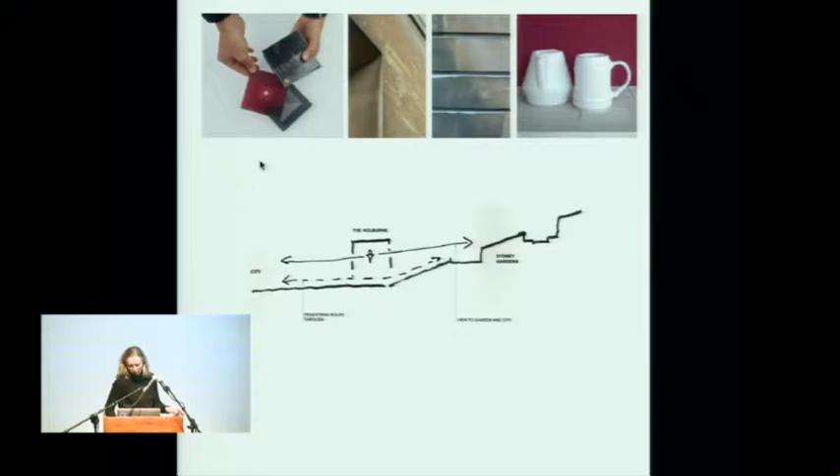We're dealing with a very delicate Georgian facade, beautifully crafted in Bath stone, and it was about how we could transform and engage to bring back this magic of memory of what had been, through the materials we use.

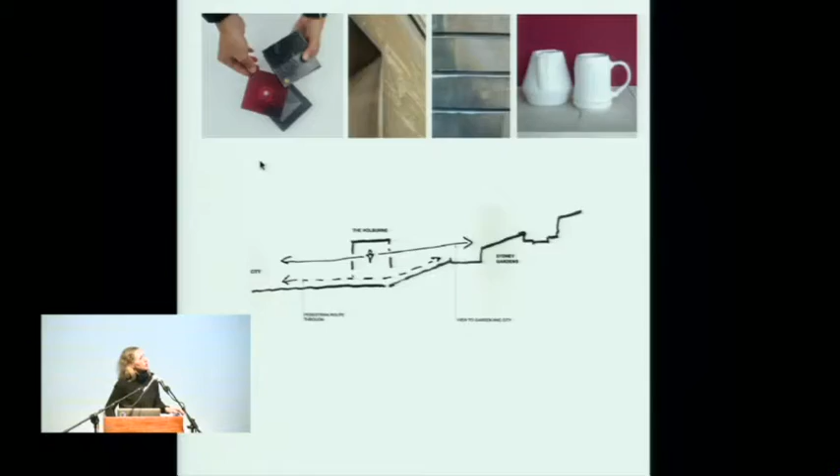For a very long time I worked on this. We decided it could be porcelain, the material. It had to have something that was crafted, that had a beauty to it, that was reflective, that actually reflected the gardens and the sky.

So it took me to research on faience and ceramic, working with a company called Shaws of Darwen up in Lancashire, who had been doing faience on buildings for over 200 years, and who were now only making sinks, Belfast sinks. But what we really enjoyed was the depth of the glaze, and that feeling of something that has been crafted was incredibly important to the project.

And it becomes a story with planners, it becomes a story with clients on how you can get them to engage in the idea as well.

From having these fins that were made as prototypes, just to show how deep the glaze is, it refracts the Bath stone behind.

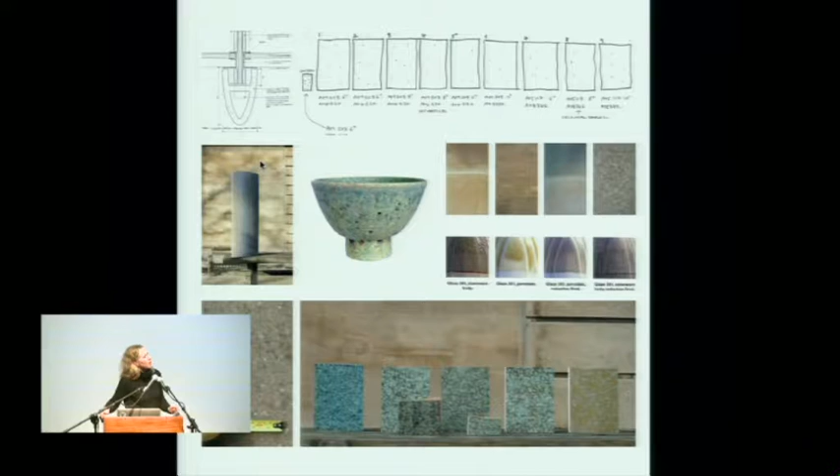These were actually a blue-green colour. And the Bath planners insisted that they should be a Bath stone colour, so the story went forward for about another year of identifying the qualities of Bath stone and looking at that palette itself.

And in the end, we had this sort of compromise of creating a ceramic that did both.

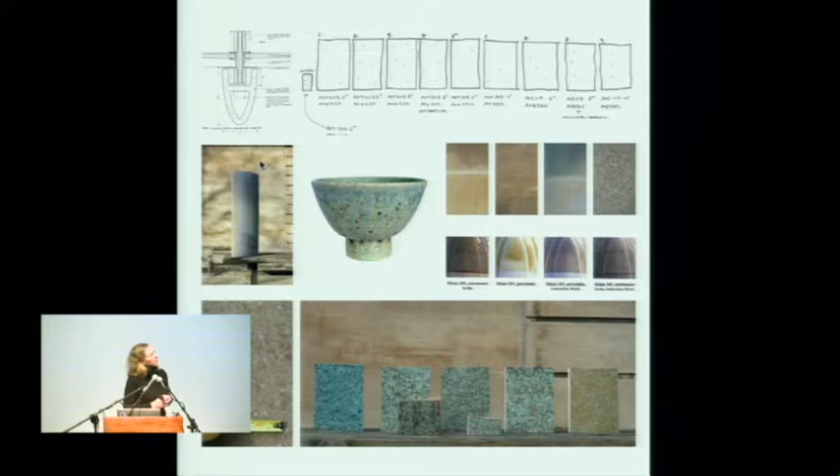Today it's a successful addition, and it shows, without even talking about the actual architecture of the extension itself, this kind of background that I came from and that interested me, and that I've taken forward with our own practice.

Probably slightly something else about the diving board. There's something about coming out of a very large practice and making the leap into something where you know you want to just engage with your own work.

So the scale of projects very much changed. I was quite fortunate - my first client I met on a Ryanair flight, and he said he'd bought a house in Spain. Did I know anything about building? I took that on as a project, and we helped, working with a local Spanish architect, look at the site.

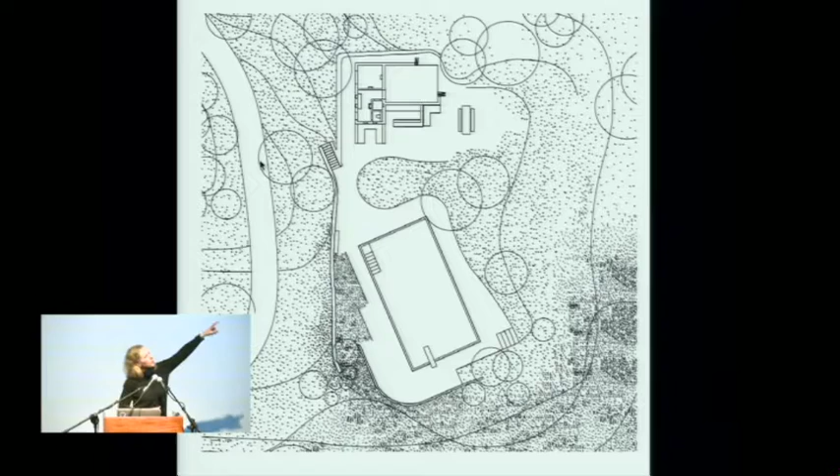Again, that really meant working - I was keen on using the natural stone we were finding around the site where the construction work was going on for the house. Working with the local stonemasons, we were able to engage with these walls and work with the levels in setting up the new pool house, which was embedded into the land, and the swimming pool, working with the existing landscape that was there.

This is a site with this incredible rich soil, and it was about embedding something into the land, away from the house, which sits in the background where you can see the crane, working within the olive trees, using the natural stone to embed something into the land.

We worked with engineers in London to create this concrete wall, in situ concrete, which could act as a terrace, giving you another plateau and level to enjoy the views around.

And underneath there was a bar and changing rooms, a gym and a small studio, and then that took you on to this level deck swimming pool.

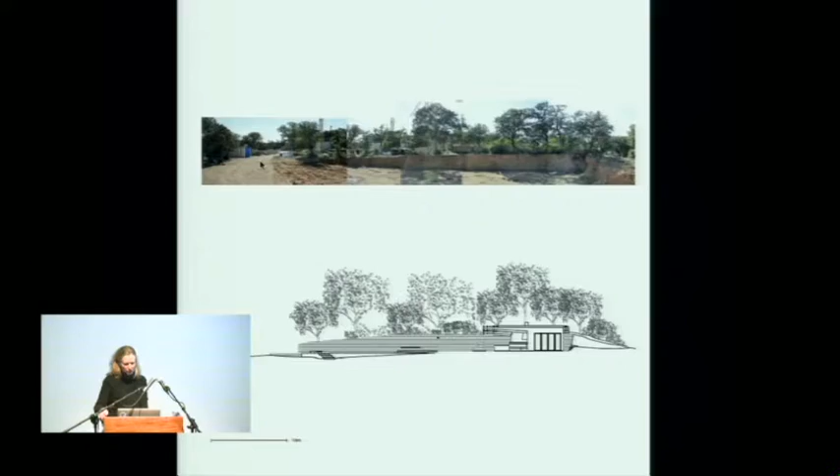We use models not just as a way of describing the project to clients, but very much in-house as a way of thinking about how we're going to build. The model is the starting point, the first thinking of how we're going to craft the idea or notion for the project.

This was done by an ex-student of the AA who now works for me, made during his year out. He carved this out of a piece of walnut. It really, to me, was about talking through this process of what the project was trying to engage with.

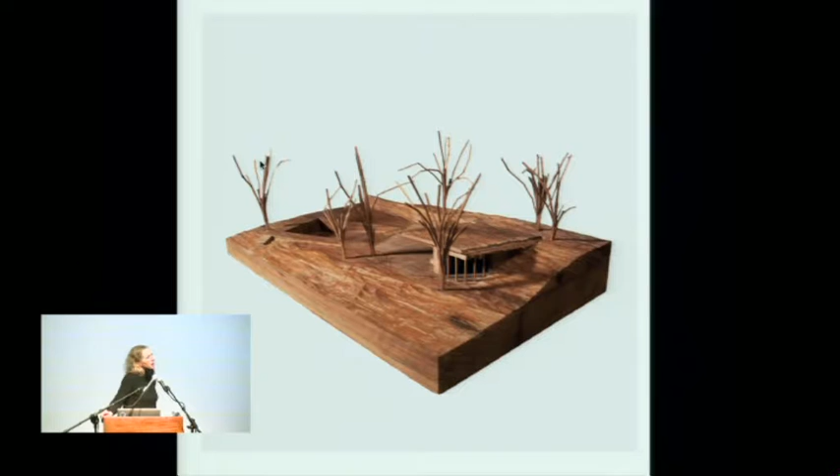It was very much from the land, and this idea of pulling up the terrace, almost like raising the land, which was propped on the corner, and then cutting the pool into the same surface.

These are just some images of it inside. So this is the concrete roof, which, obviously with the weight and thermal property of the concrete, keeps the interior very, very cool. It has a central spine wall and these four fins in which sort of timber louvers are woven in.

Unfortunately, the quality of the build in Spain at the time was not very good, so it took me being there and working with contractors to get the details and have it made. But it was an enjoyable process.

Again, forming the walls. Often the drawings were unable to translate to the local guys who were on site, but it actually meant more of a project of being there and deciding where staircases went, marking them out, and working with the land.

For the pool, it was about the idea of engaging with the horizon, so there was nothing coming up from the land. We used local Spanish limestone, and it's still settling. These projects take about 2 years before they start to bed themselves down. They've had a very dry summer, but the idea is still there.

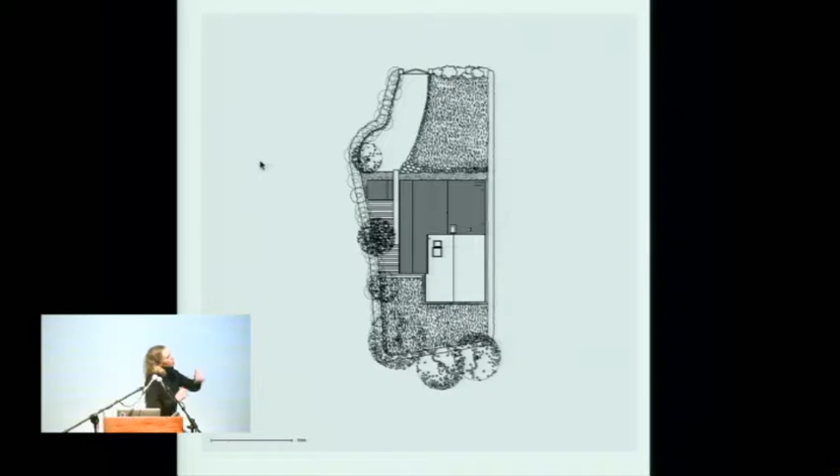But as you can see, this house sat within a very large garden plot. It was all down to the fact they had about £50,000 to spend, and what could we do for £50,000? So the economy and efficiency within the thinking of this idea was really the driver for the project.

Not just in what we could rebuild, but thinking what we could retain. So the birch ply back box of the house was the existing sleeping block, with 3 bedrooms and a bathroom within it. By retaining that and wrapping a new extension to the front, we were able to remodel the house and give them a large living kitchen dining space on the front, a hallway where people could hang out.

We're kind of amazed with the quality of housing that's being offered, where everything has to be worked to a very minimal dimension with minimal ceiling heights. So this idea was actually to play with volume. It's not expensive - it's the economy and efficiency of the materials you use and how you design and plan these spaces.

One of the clients - they were both teaching at university - wanted the ability to work at home, so there was a small office which could also double up as a 4th bedroom. So it was this thinking through of how they would actually use the space.

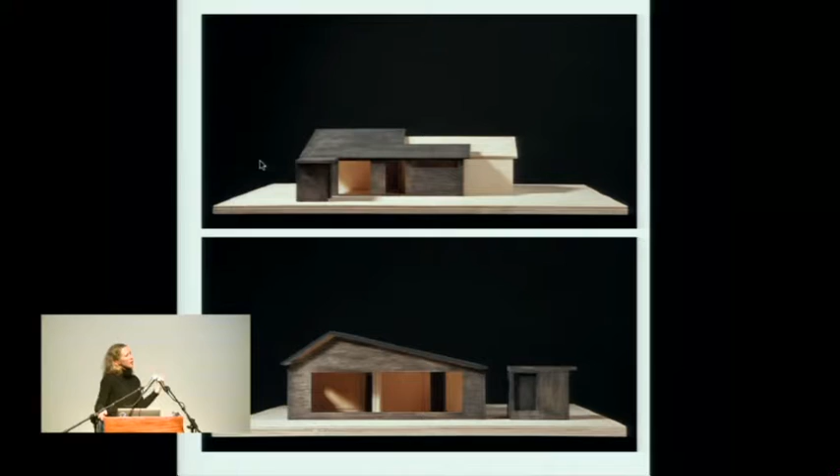Where we had openings, the side slot openings at the top allowed an engagement with the garden, which was actually quite well planted, and also to do with neighbours that were bothersome on the other side. So as we turned and worked around the elevations, it was making decisions about where light would and would not enter the building.

Again, talking about making the model for this project, slightly like a doll's house. My 3-year-old daughter Jean, at the time, loved this house. When I turned up, she could understand her house, she could understand where her bedroom was.

While doing the laser cutting for this, the plans and the elevations were always simplified. I kind of enjoyed this project because there was such an efficiency to every detail, to every elevation, that it was the piecing together, or the reassembly, of this house. We were taking what was there, getting rid of the parts we didn't want, and then piecing it back together again.

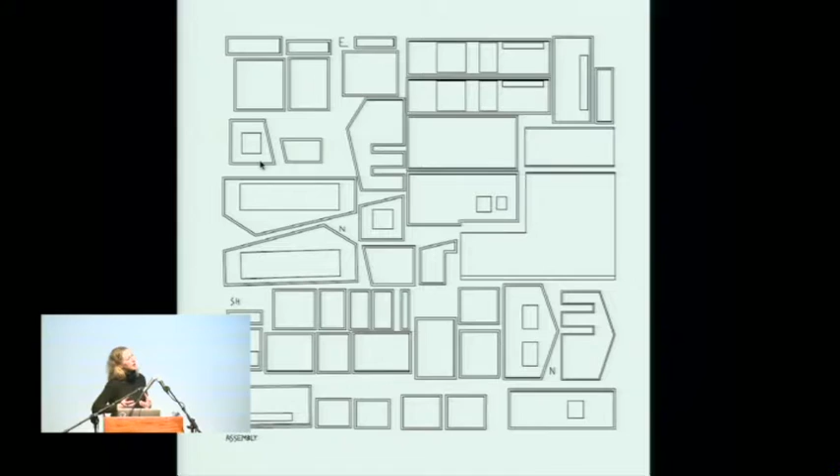We used a black engineering brick as the main facade. One of the clients is a fashion designer. She wanted a Tom Ford house. She said, why not? And so this became the Black Sheep House, as it was known by them, because the suburban neighbours thought, what on earth are they doing? Why are they doing this to their very nice bungalow? So Black Sheep House it became.

Working with a great local builder, we worked with local trades, so the local brickman was absolutely brilliant. We had a slate roof put on, and there was nothing heroic about the geometry or form. It was very honest. The materials were honest, and the design had to be incredibly honest. We used softwood, painted timber windows because we couldn't afford hardwood windows.

This sort of thinking through all the materials, the cost of every material, was a very different approach to where I'd been in Granada, with a hedge funder and his wife who had taps flown in from Spain, from America, because we can. This became a very tailored project, but everything was done with intent and honesty.

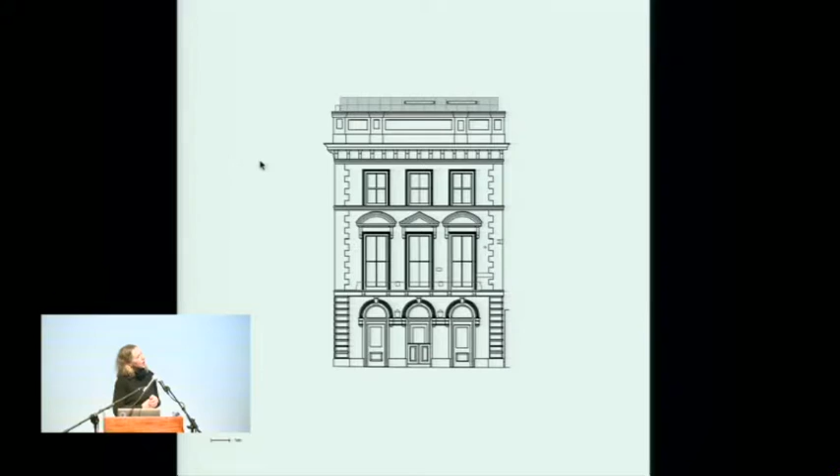So we've taken these volumes and taken the buildings, and again we're generally battling with planning on how we can add an extension to, say, a roof. There's a bit of sort of dentistry, really, in how we knit into these existing buildings and give interesting flats, apartments to speculative buyers.

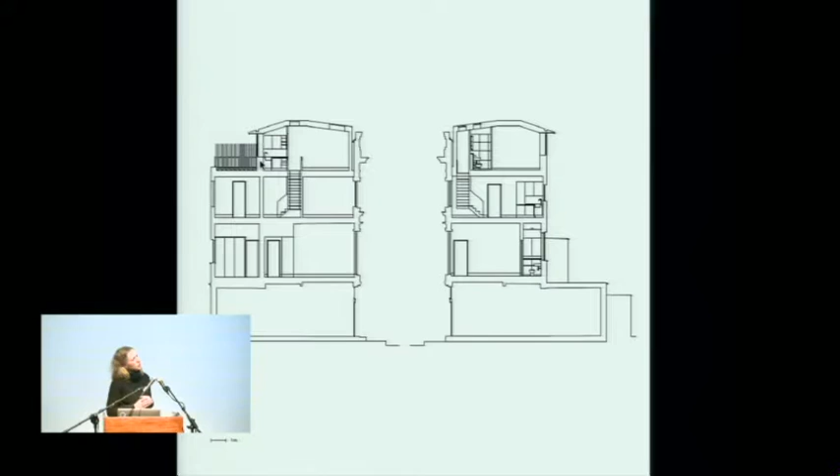This one in Fulham, we were blessed with a very high parapet on the front elevation. So the idea was we could tuck in this kind of metal box behind the parapet and create new duplex apartments with a terrace to the rear, engaging with what can be interesting living.

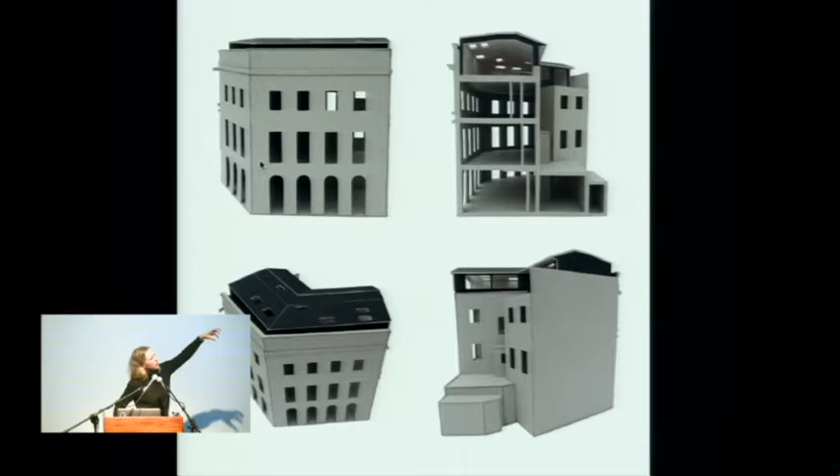The next series of photographs are done by photographer John McLean, who I've worked with on and off over the years. Rather than give him a brief to capture the work, he just went in and did these triptych views of how he's seen the interiors.

Again, it's reinstating what the good is that's there - keeping existing windows, upgrading the building fabric, putting in good quality oak floors, and creating spaces and connections to other rooms that become interesting ways of living.

We're probably doing - we have a portfolio of about 3 or 4 of these projects - looking at how we carve staircases in, or make staircases in, and how we can actually create quite pleasant living spaces from top-lit lights.

And rethinking how we can detail handrails. We're always dealing with quite constrained spaces, so again it's thinking about how we can make cuts in walls. It's not about adding things in - everything is thought through as part of the initial concept.

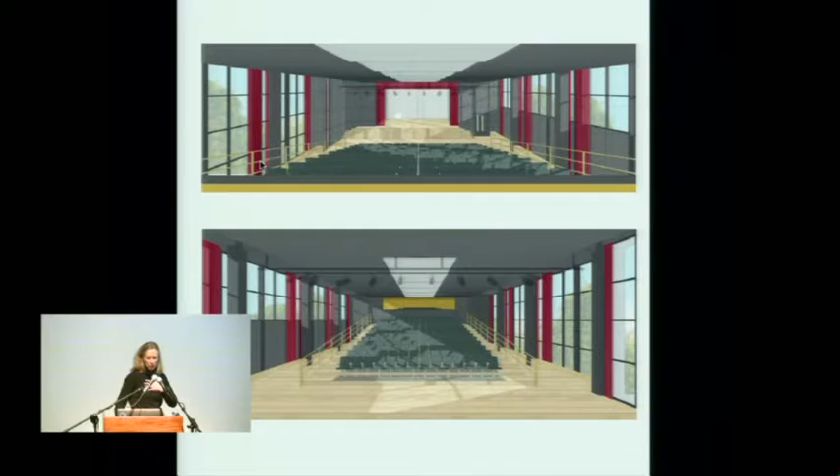These are just simple images, actually all done for a client. Again it's this idea of representation for something that they would understand. We've had to work with these existing red velvet curtains, but putting in a new seating structure.

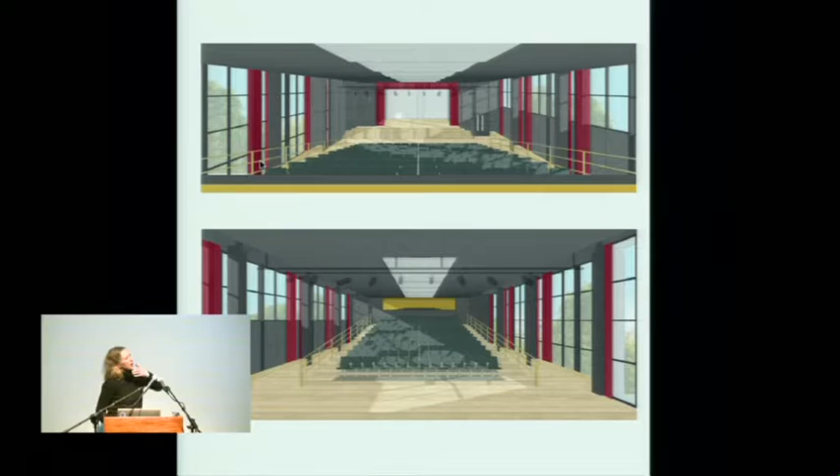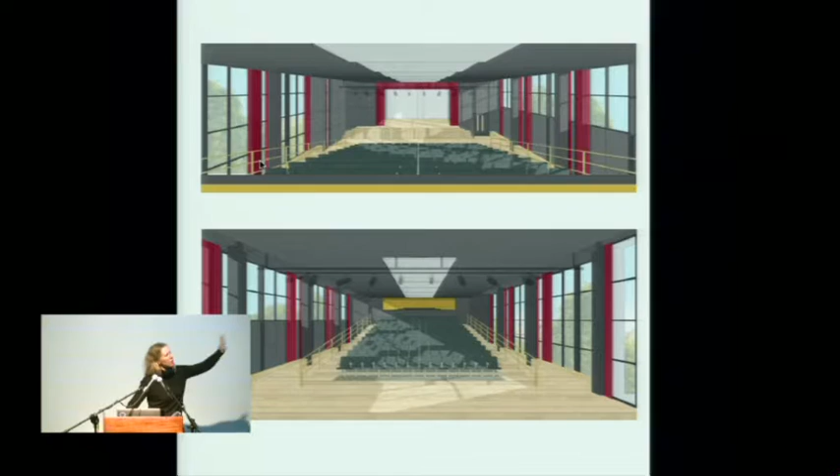We've punched through the back wall to create another seating area behind, to increase the flexibility of the space. This is under construction - we're recladding all the walls.

Working with a great joiner to actually be able to make and think through some of the details, we've put together quite a nice pack of information, thinking through how the panelling is made and how that works with the simple construction. Every corner and thought has been considered.

In between doing these live projects, we have done quite a few international projects, competitions. I've kind of veered away from UK competitions because we never get anywhere, and it's very difficult when you start up - you don't have a body of work, you don't have a reputation.

So internationally we were successful in getting onto shortlists, and the church scheme that we did in Våler in Norway two years ago - we came second out of around 700 entries.

It was an interesting journey. I went out there, like I do with all competitions, to see the site. It's a kind of one-horse town, about an hour and a half north of Oslo, in a very wooded area. There's a very big pulp mill next to it, and this notion of the church being a beacon in this quite flat landscape, for a very large community, in a town that has 2 petrol stations and a hot dog stand.

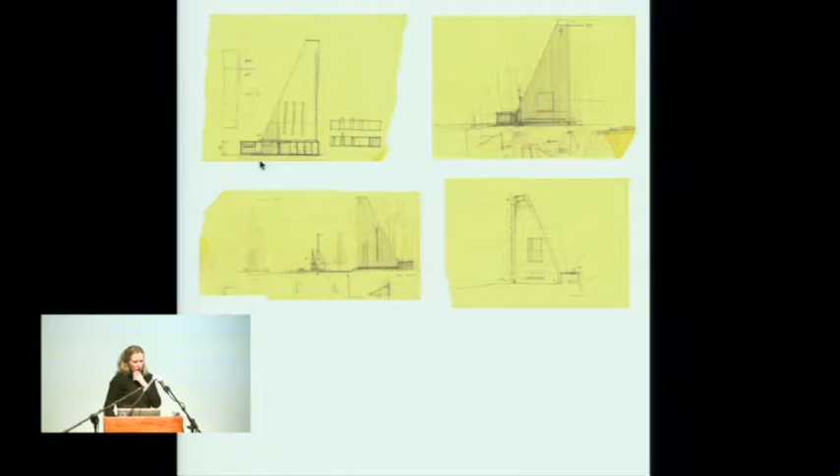Early thinking through of the elevations, and really the model became a way of thinking through this idea. We worked with Simon Smith, of Smith and Wallwork, who works a lot in timber as an engineer, and I knew myself from having been to Norway and also done a previous competition in Finland, the harshness and how you build in that climate.

So the idea of the shuttered tongue and groove external box gave the contractors a time period where the external walls could be built, the shuttered box could be built, and then the interior could be constructed during the winter months. So there was a kind of continuous flow to this program.

The kind of research and thinking, obviously, with stave churches and this mythical and narrative element within Norwegian history, meant that this interior could be—the brief required—all timber.

So we came up with this idea of stacking these timber blocks. They're about, I think, just over half a metre long by about 200 wide, manageable pieces that could then be stacked to form the main worship space.

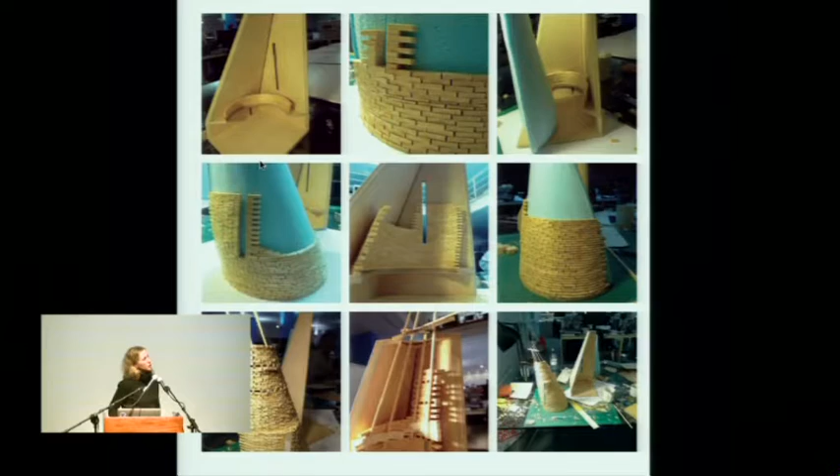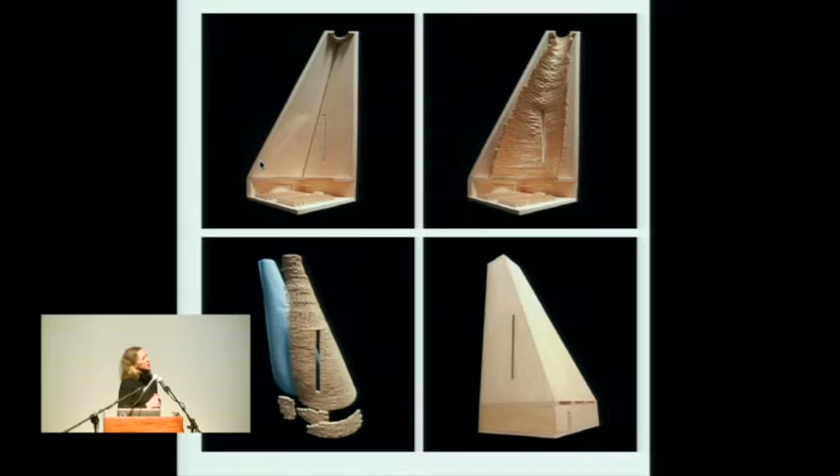So this set of images really tells the story, that this shroud to the external world and this crafted interior to the inside, and the idea that these blocks could be carved into, and they offered further connection with the community itself.

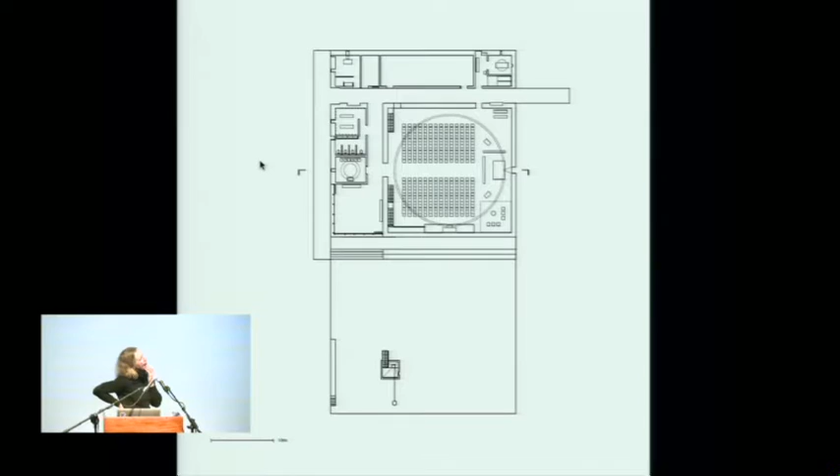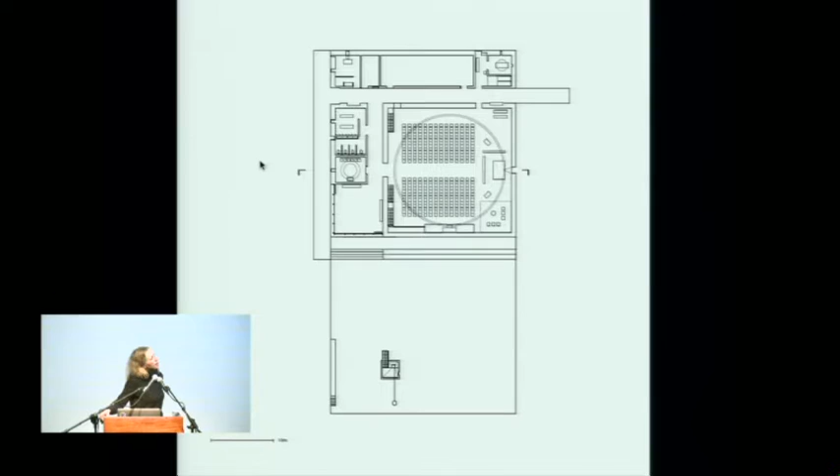A really simple plan to do with a civic space, a civic face to the square where the bell tower was, main entrance on the corner, public entrance on the corner. So weddings, baptisms, celebrations could enter on to the main public space. There was an entrance at the top for the minister or the priest, and then there'd be a more private entrance for funerals to the east elevation at the side, and so that was the ordering of this plan.

The only thing I felt was important was a way of refracting sunlight. So a notion of suspending this bronze ring within the main worship space would also maybe play with the acoustic as well.

Moving on quickly, Store Street - some of you may have seen, a competition we did for the London Festival of Architecture last year, and we were successful. Again, it was temporary architecture, something I hadn't ever done before, so that was a whole new world of thinking. One of the main drivers for this project was a conversation we had with the Building Centre and New London Architecture, who were battling with Camden Council, because this is a car park, the North Crescent to the South Crescent to Store Street.

You probably know it, it's just across the block over there. They wanted to get rid of the cars - there were sort of 4 or 5 car parking spaces - and they wanted to regain this crescent to use it for events, pop-up events, and also for the people working around there.

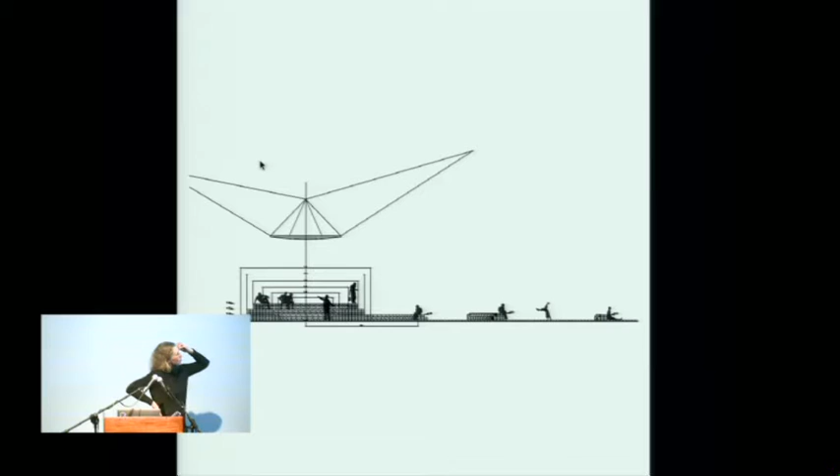The other idea was we wanted to have this kind of disc of water. At the time it was flooding everywhere at the beginning of the summer last year, so on the news all the time was more flooding. And so there was this tension between this idea of water and the amphitheatre and this surface that would be of the sandbag.

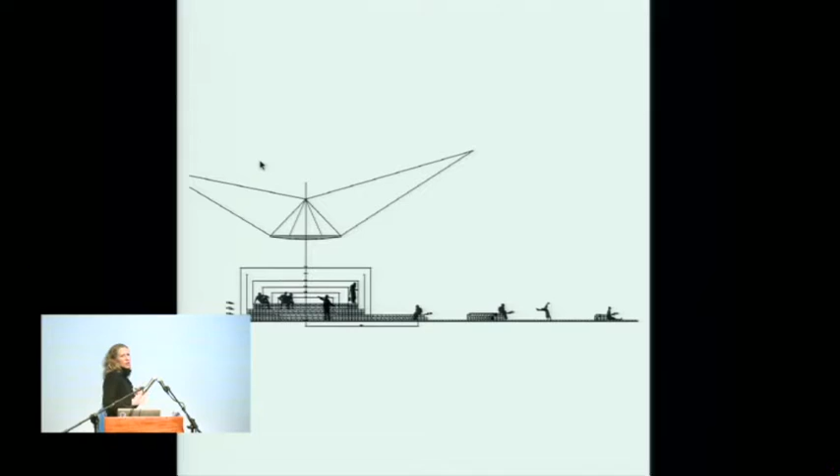Again, this model has travelled far and been used a lot and picked away at. Really, it was to convey this notion, and it was used for planning purposes, and we were successful in gaining back this square for the residents of Store Street.

And then a lot of research, going back to when you look at the research done for something like the Holborn Museum, even though you've only got 3-4 weeks to design and build and raise the money and physically make this crescent, which I didn't realise I was doing. It was important - it's about detail, about understanding the material and the object that you're wanting to use. Grade 1 military sandbags are beautifully, beautifully made.

We did a lot of research. We have a lot of sandbags in the studio, unfilled sandbags, and the stitching on these grade 1 military sandbags is beautiful, blanket stitching. It was a real craft industry. We worked with a guy called Paul Mitchell Sachs down in Cornwall. He'd been making these sandbags for 100 years, and there was nothing else like them, unlike the new plastic sandbags you see looking very sad holding down motorway signs. I found myself cycling around London seeing another sad sandbag, with nothing of the grandeur of the military grade 1 sandbag.

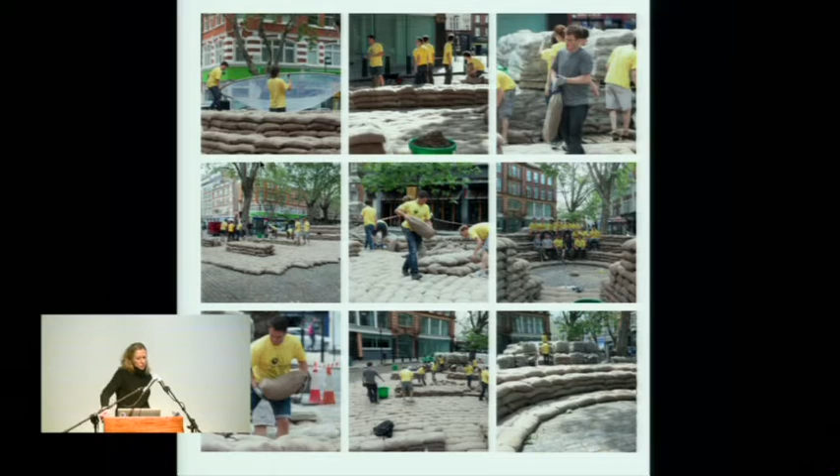Getting the sandbags there, 7 articulated lorries came during the night, and then with some graduates we had 3 days to build this project, and it was a fantastic experience.

It was incredible how on the Saturday and Sunday people stopped and asked and talked to us. We'd planned it, we'd drawn it, we'd detailed it, and it really seemed to capture people's imagination, exactly this idea of how we saw this object, with them saying, 'What are you building? Is it a bunker?' But then afterwards, apart from the fact it rained continually for the 3 weeks it was up, people really used it, and it didn't matter that it was wet.

It was from here that we were invited to Venice. And God, do they need sandbags in Venice? So they thought, this is good, and we were invited to come up with an idea. They really just wanted Store Street for Venice, and I was unable to do that—we don't think like that, I don't think like that. So I said, well, we'll look at a site and we'll look at what we can do. Obviously the sandbags and Venice in ruin, and Venice flooding, it worked, but it was understanding how we would apply this.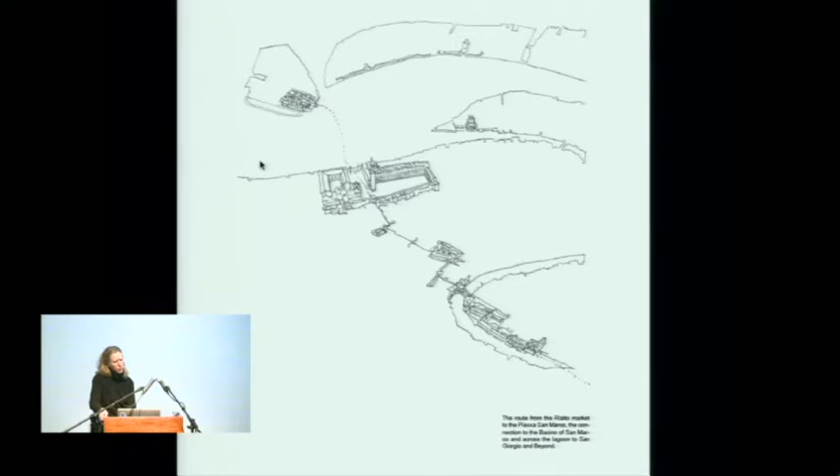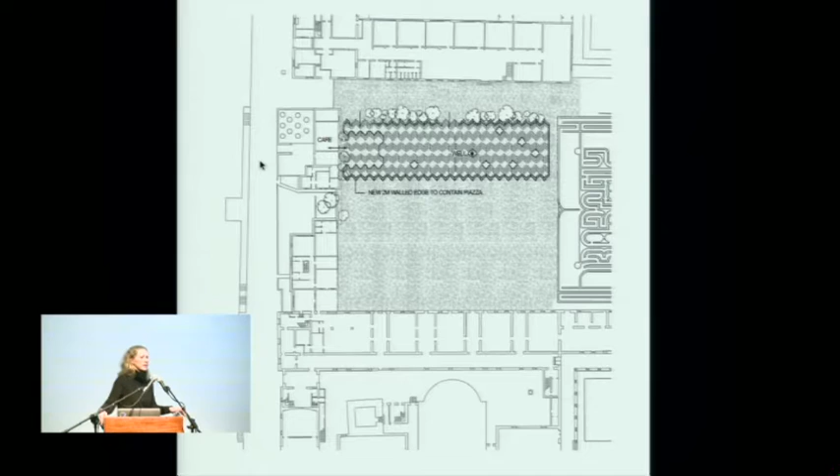So the thinking evolved. What didn't evolve with San Giorgio was, it's quite difficult when you are given a space and then the monks don't want you to have as much space as that, and the funding you have to raise, and the whole cost this year of trying to conceive this project, it just wasn't gelling. And also, this is not what squares in Venice are about.

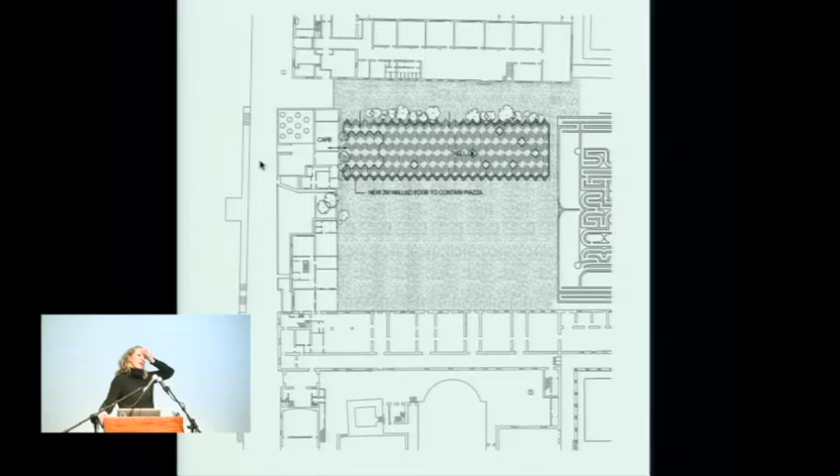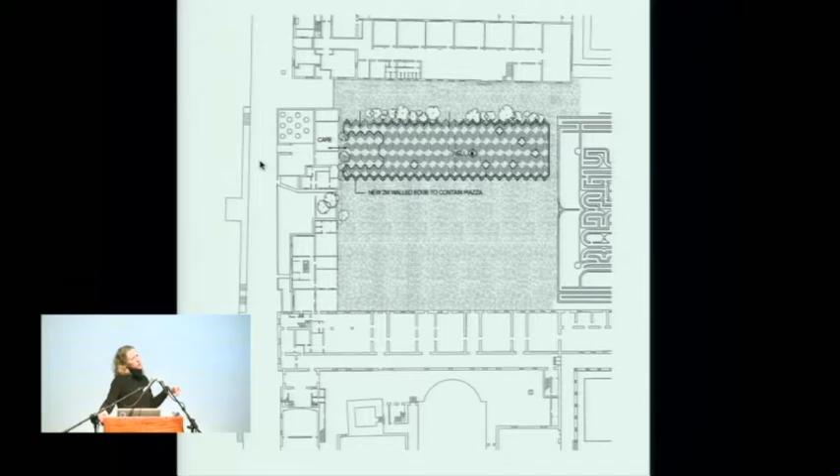Squares in Venice happen between buildings. They're passageways that come together. It's not, let's build a church and, oh hello, let's have a square. It's actually the spaces around, the spaces in between these buildings. And this just felt like, even though we were being asked to give them this square, this idea of the walled square just didn't work on plan.

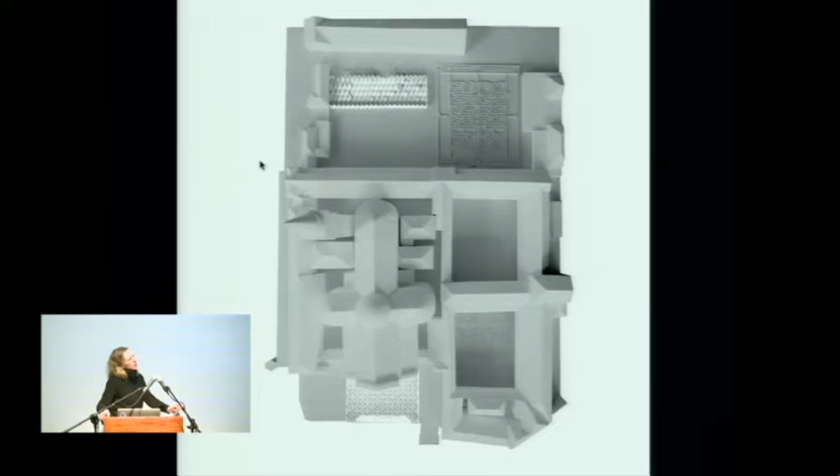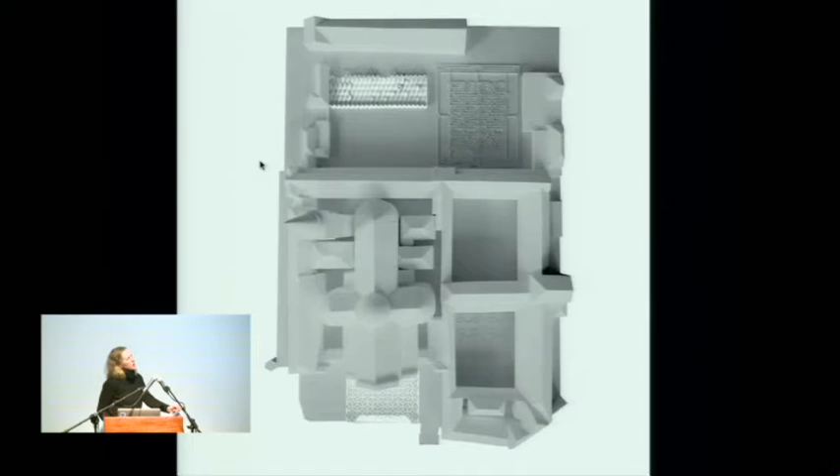And I'm happy to show this and happy to say that it doesn't work. It's an idea. The thinking was there, but it didn't engage with the notion of what we were trying to do. So I stopped, and we were asked about a month ago to reconsider doing a proposition for next year's Biennale.

And the surface, this idea of Masegni continuing along, is something that we felt had more of a narrative to what we were talking about. San Lorenzo is an interesting church, architecturally. It was the facade that was never built.

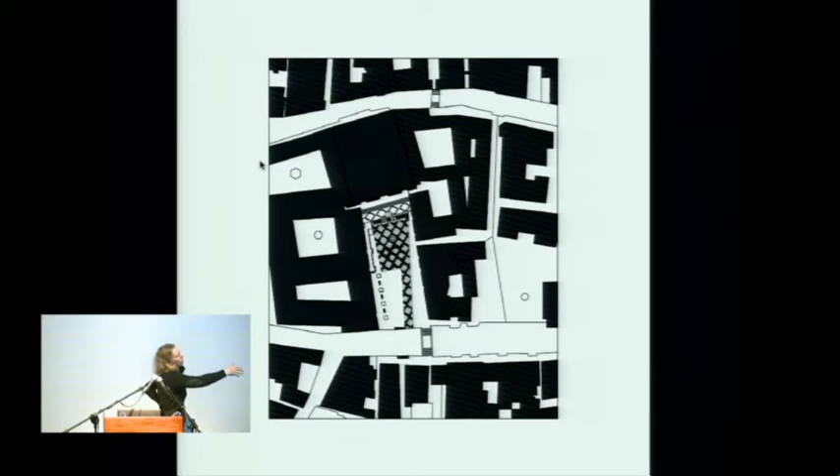Again, how we can take this idea of the square becoming part of the only connection across the lagoon, but actually building a wall that maybe never was - a wall that isn't about defence, isn't about keeping people out, but it's a wall that you enter, and it becomes another passage to the square.

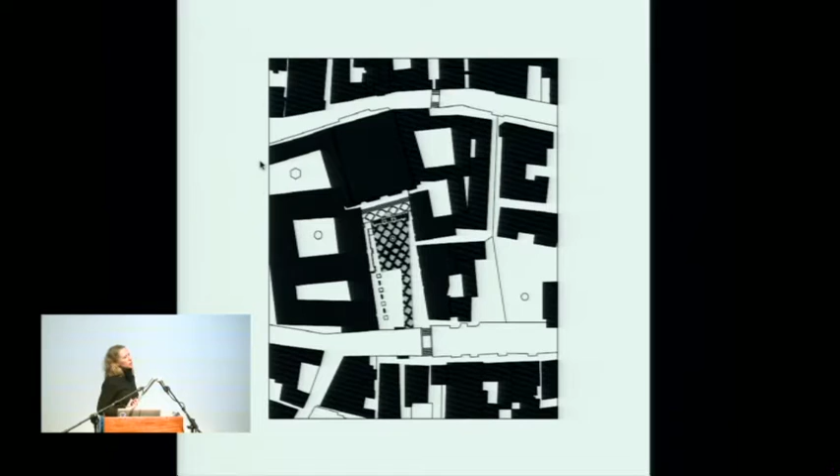And thinking again this idea of surface and marbling that we were thinking about before. And a wall that has two sides, one towards the square and the other towards the church itself, and this dislocation of wall to create this new space. And the thinking will go on this one.

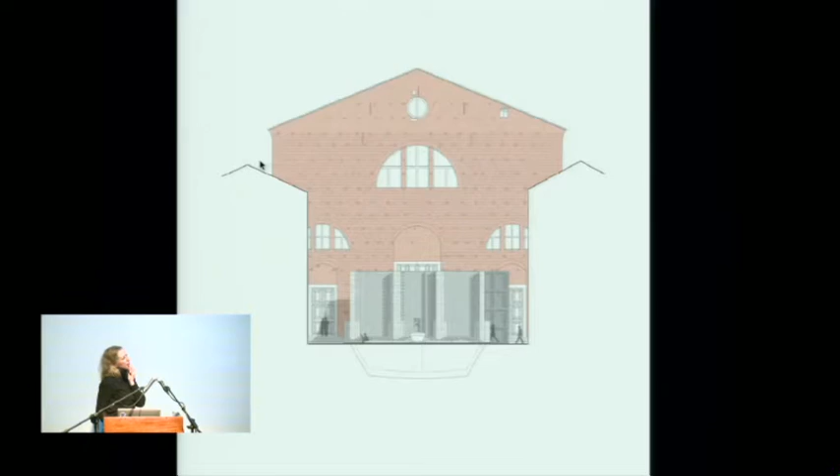And so forth, and possibly we will be able to offer another space. Finally, another part of the country we're working in is in Scotland, up on the Argyll coast, in Argyll and Bute, just south of Oban, a place called Loch Neish.

I was approached by an old client who's a trustee on the museum, about a year ago. He sent me a photograph and said, if I showed you this site, what would you build? It's a 12th century medieval kirk, with the remnants of the graveyard around it, and there's this strange ensemble of buildings.

There's a boathouse down on the edge of the loch, in the corner there, and there's what's known as Kirkton Steading - a farm cottage and a barn that sits next to this medieval kirk. The land has been in the family for about 150 years, and they have a lot of these little buildings that they want to use for the family, but also as holiday lets, holiday cottages.

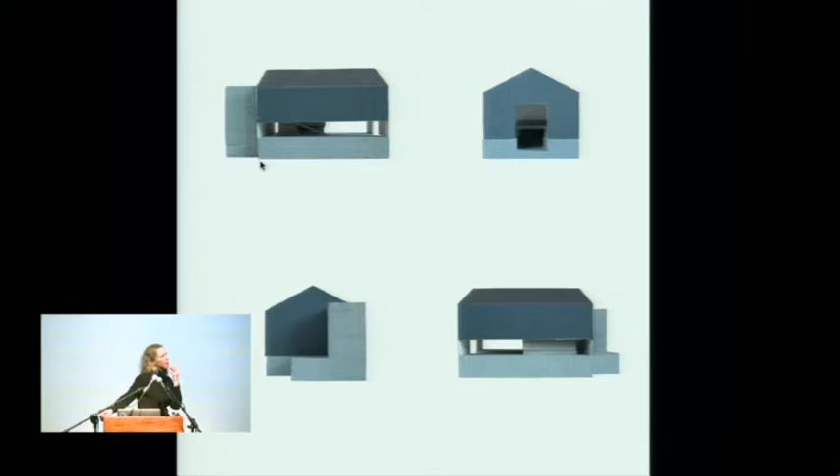So this is just simple thinking of how we stretch and jack up - we cut the base of the cladding, then prop and jack up this existing steel shell, and create a new platform for sleeping with a staircase above on the concrete, and build a toilet block to the back. By jacking up this facade, you get these windows on the long elevation, so you engage with the landscape - you'll be in the landscape, but always get the great view from the main elevation.

And these are, if we work through ideas of whether it's timber or if we don't keep with the steel wall, but just keeping that form. The battle will not be the boathouse.

The battle is with the tower, and with the setting, as you can see in plan here. It's very much working with this edge - the rock behind the existing steading is where the stone for the steading and barn were taken from. So the crofters would arrive and just work with the land to build a house, hence the orientation of this within the landscape, and also how it sits to the wall of the kirk. They weren't obviously being met by English heritage when addressing this project.

But it's very beautiful, this oak tree that sits to the side of the kirk, and the only other tree that sits on the rock behind. So it's actually working with the land and how it's orientated to the views, to engage with something that becomes a 6 metre by 6 metre plan, and it slightly turns its back to the kirk - slightly dancing away from this form of the two houses.

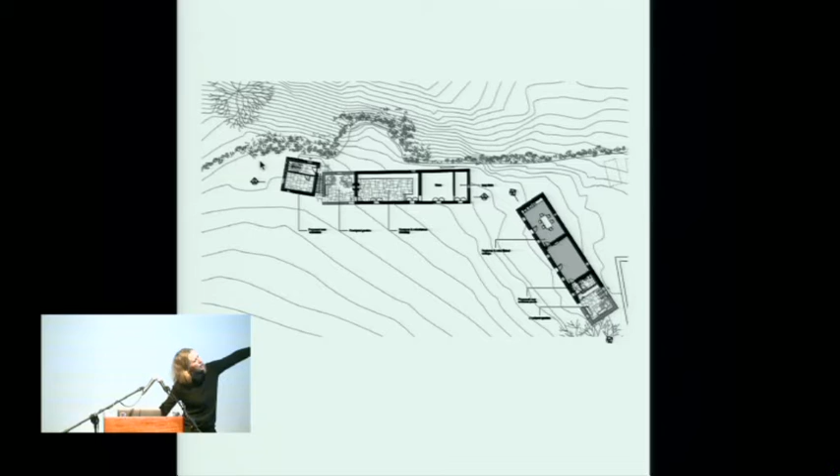You'll get a living space and a kitchen and dining. Now that house in itself, someone could live in on their own, or a couple could live in or stay. We'll probably build a mezzanine.

We're just basically doing a very light touch to the inside of that. We'll put in new windows. We will line the walls and the roof, but very little else.

The idea as a grouping of buildings, as one house, is you go outside into the land to enter the next building. It doesn't need to be covered - you will get wet, but you're always within the land.

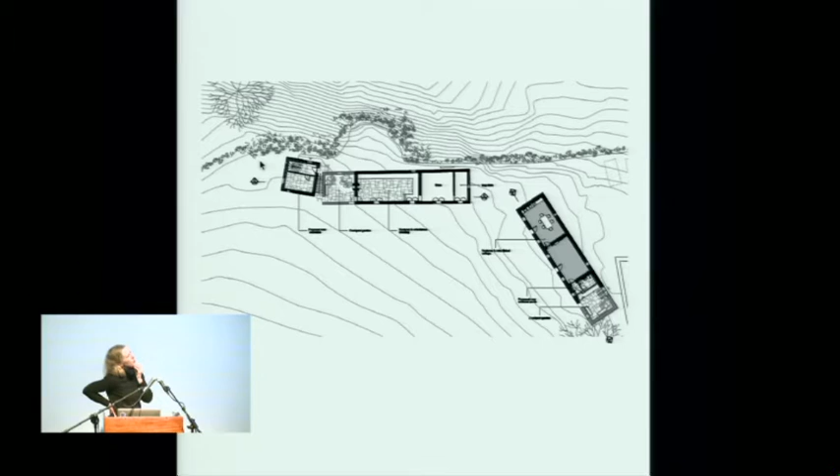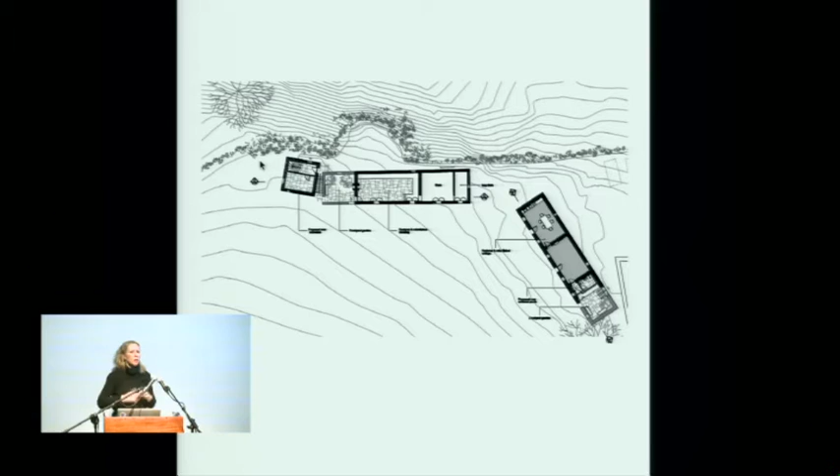The existing outhouse will just be a large reception, a sort of party space, I presume, with a log store at the back. And again, the ruin of the walls that are there becomes another internal garden. We're not touching or doing any adaptation to that area, but that becomes the connection between the tower and the outhouse.

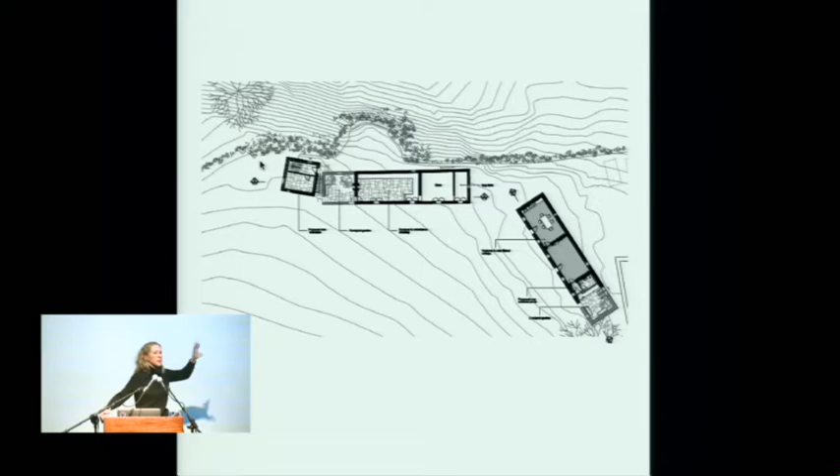And then, as you can see, you have a new entrance as you come around the back of these buildings into a staircase and then a room. The plan is repetitive, really, on three floors, until you enter at the top, where you're in a sort of four-metre high living space.

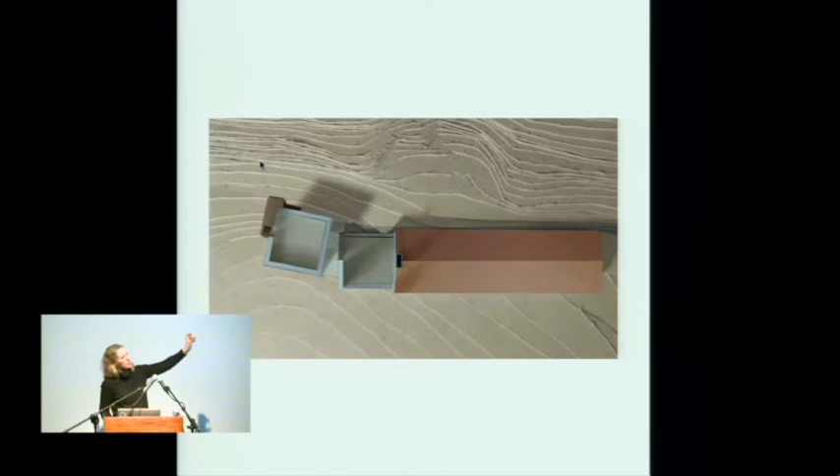A simple plan, again, reinforces this six-metre by six-metre and this kind of disconnection from what is there. And the idea of a staircase that from the top floor will take you out onto the roof.

Salim will laugh at this if he remembers his student days with me about the obelisk, the rising of this form. So you have this eighteen-metre barn that's there, and how that can be elevated. Through now we're in detail, it's changing in form, but I think this proportion is important to what we achieve.

And the staircase at the top, it will be steel. We're looking at a lot of research just now into shot peen steel because it will weather very well, and it's an add-on - it doesn't have to be the stone. It is something that will take you up in a much lighter world to the views beyond. And that's it.

Yeah, sure. Or not. Any questions? Oh, hi. Hi.